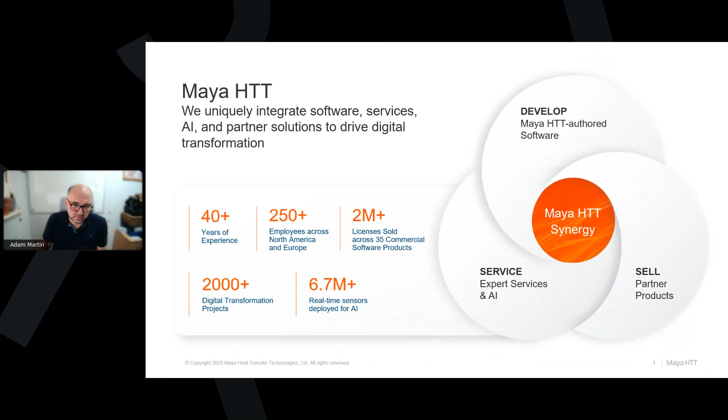Just a few words to start on who we are. We both work for Maya HTT, a global digitalization company where we focus on integration of software services, AI, and partner solutions, notably Siemens digital industry software, to drive digital transformation. We are one of Siemens' largest global partners, and in fact we've been in the digital business for over 40 years.

We have over 250 employees across North America and Europe, and now have over 2 million licenses sold to our clients. Maybe just to take you to the diagram on the right, our three core business activities are around software development. We also offer services around some of these software components, and we resell the software tools in both North America and Europe. Go to the next slide, Adam, please.

As mentioned, Siemens is our long-standing global partner. We've been really fortunate to have this collaboration with them, both from a technological partnership where we develop over 30 software modules in the Siemens digital industry software portfolio, but in addition we service and resell these software tools throughout the globe. So we've delivered over 2,000 services projects in PLM deployments, bespoke software development, AI, and using the data alongside the digital assets that our customers create to get the most out of it.

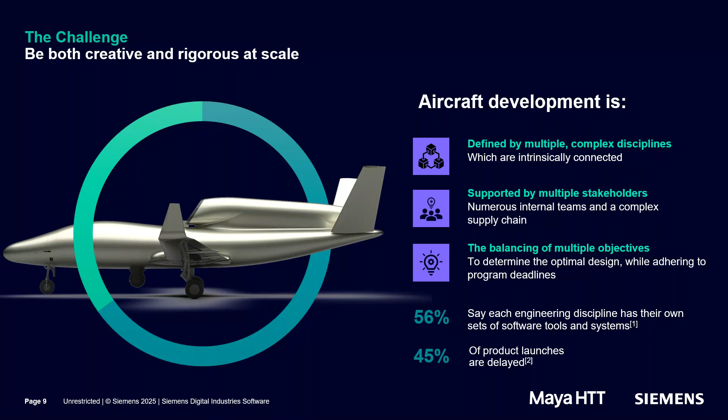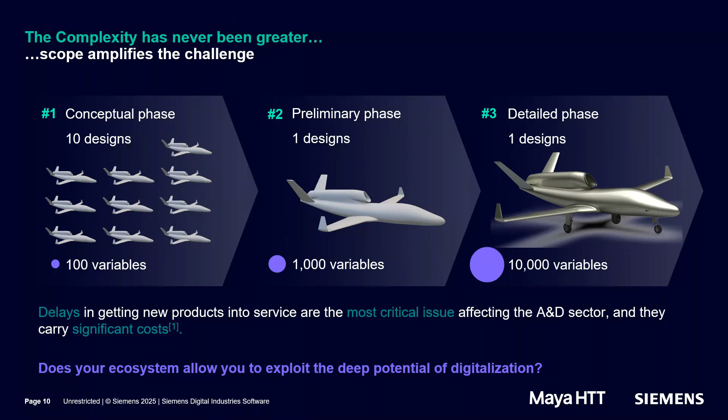As stated previously, delays in getting new products into service are the most critical issue affecting the A&D sector, and they carry significant penalties, a lot of that having to do with dealing with the complexity we're describing. So maybe the question to take us forward—the whole purpose of this webinar—is: does your ecosystem allow you to exploit the deep potential of digitalization? That's what we're going to explore in the next couple of slides.

Go to the next slide, Adam. So how do we bring innovative designs with improved manufacturing, manufacturability, and high performance faster to market? That's where we really bring together our partner Siemens's long experience in manufacturing with our experience and their strong experience in digital as well. Go to the next slide, Adam.

And really introduce the concept of digital twins. We'll dwell on that for a second. So instead of speaking about tools, whether CAD, CAM, CAE, or AI, we're talking about connected solutions, connected digital threads, each acting in key parts of the design, simulate, and manufacturing process that our aerospace and defense clients have to deal with.

Whether we're looking at mission-driven systems engineering, we build a digital mock-up, but we also look at the mission profile to ensure we meet all mission requirements. Another key digital thread, our focus today, is around taking design simulation tasks and having them work in tightly integrated, multidisciplinary and optimized fashion. We'll definitely focus on that.

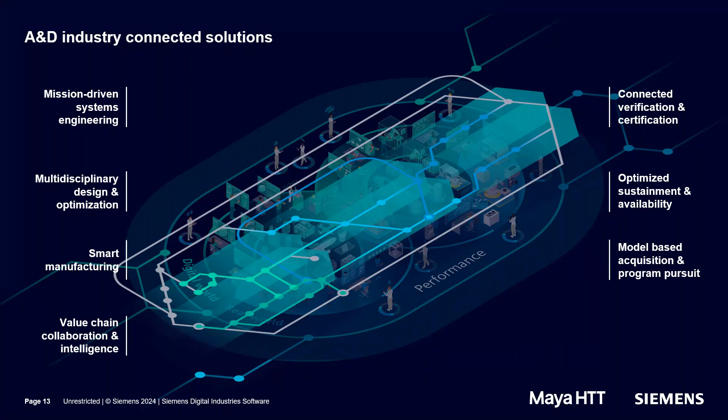Just go to the next slide, Adam. As stated previously, for today's webinar, we're really going to take a deeper dive and give examples around multidisciplinary design and optimization. Next slide, please.

So a few more words on some of the key ingredients to making this multidisciplinary design and optimization digital thread successful, and what we're effectively trying to do in practice. First of all, and that's one of our three focus areas, it's important to leverage a single source of truth to break down silos.

Really ensuring that at a program level, all stakeholders have access to the data and the latest versions of designs, change notices. So that's definitely one of the key ingredients and solutions to making some of our A&D clients more successful.

The second one, which is a classical challenge but also important, is around integration of mechanical, electrical, electronics, and software disciplines together, working in collaboration across teams. So making sure the over-the-wall classical approach is removed, that we really have a thriving collaborative environment, achieved by an integrated digital ecosystem that our clients operate with.

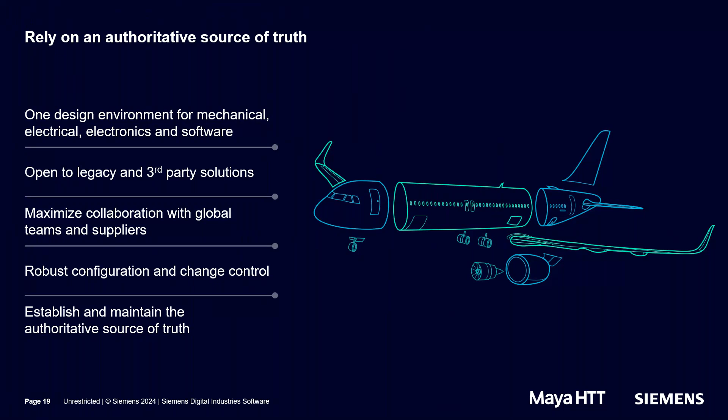So obviously for us, that would be a solution like Teamcenter. It's kind of the backbone of the digital thread. We're going to be storing all the data and different elements required for the workflows in the digital thread in Teamcenter. It's a unified platform for managing the change. So as I mentioned already, that's an important piece.

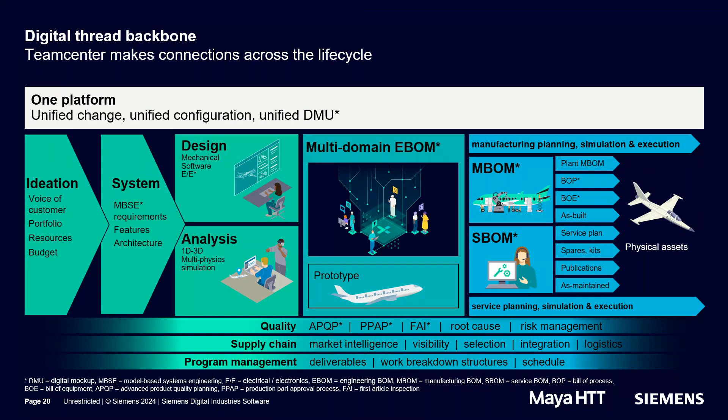And we've got the digital mock-up, effectively the designs that are available to us. As you can see from this slide, it's pretty comprehensive what Teamcenter can support, full life cycle right through to the service and service life of your products. But I'm just going to take a little bit of a deeper dive and look at some of the key enablers for the multidisciplinary optimization digital thread on the next slide.

So here we have a few of the kind of highlight areas, and I will be covering these in the examples. That's kind of why I'm introducing them at this stage. So at the beginning of most designs is where there is requirements.

And we're capturing those requirements, and we might be starting with systems models, so functional models of our system, and assigning requirements to that, which will be parameters. In Teamcenter, it's pretty open. You can work with something called System Modeling Workbench or Rhapsody or Cameo products, and link those in, and bring your requirements in.

And then clearly, for our design, we're going to work with CAD and the configurations of the different products. And we've got workflow capabilities to manage this, around assigning tasks and going through review steps and gates and so on.

And a big element of this is also what we call simulation process data management, SPDM. I guess many of you will be familiar with this technology, but this allows you to, within the Teamcenter environment, integrate your CAE tools and workflows, build, manage processes, reuse those processes, and capture the meshes and all the load case information, everything around simulation that you would do on designs, and link that back to the original geometry and the requirements that drive that in the first place.

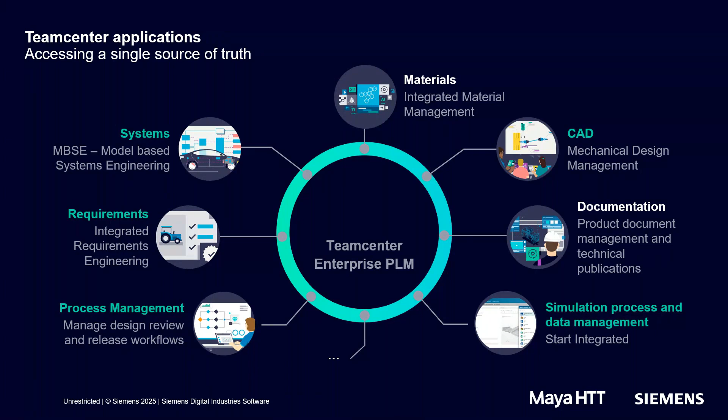So on the theme of integration, let's move to the second key element. Now we've got the foundations in, that's basically bringing all aspects of design together. This is where we look at the different physical areas we're working on for a product, and bring those together, ensuring all team members are working on the same and latest data, have visibility of the changes, regardless of which function they are.

You can see on the slide a lot of those examples, and that would include things like electrical design, we can bring together with the geometry, and then all the simulation capabilities in these different areas as well.

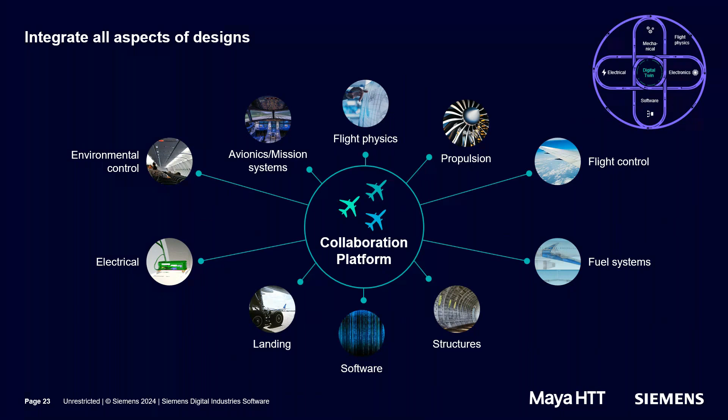So to illustrate this and how that might work, I've got an example to show you here. There's a lot of stuff here, and I'll talk through each of these steps one by one. Here we're looking at a design process around landing gear design.

It typically would involve multiple stakeholders, i.e. multiple engineers working on this. I'll take you through the product definition, cross-functional product engineering, verification and validation steps, and how that might look in the Teamcenter environment, working as a backbone, and linking that to the various tools to do each of the tasks. The example is a reconnaissance drone.

So we'll follow a process, and it starts with requirements. We'll look at that as the first step. Then from the requirements, we can build a multi-level functional systems model of the drone. In our case, our landing gear topology architecture, so how it fits together, has not been defined yet.

So we'll take the requirements and use a generative tool to build that topology. I'll show you a little bit of that. Once the landing gear topology has been defined, we can update our functional model and simulate the system level to make sure all the requirements are met.

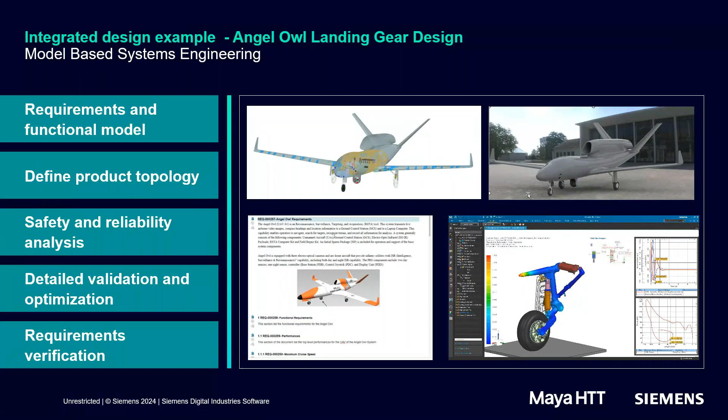And we can update and link that to our requirements. So we can then relate the requirements right down to the detailed model and vice versa. So it's a bit of an example of this integrated design process.

So looking at the first step, and I won't spend ages on each of these steps, just want to give you a flavor. Obviously if you've got questions, then we can have follow-ups and deep dives into these in follow-up sessions if there's anything that interests you here. But the first step here is we're looking at a functional model of the drone.

And it's bidirectional, and you get complete traceability. So we can look at a requirement, we can look at the parameter values associated with it, we can navigate to the functional model representation of that, and then later on you'll see how we can link that through to the geometry and the verification and validation simulation or test steps we've carried out with that.

So moving to developing topology. I've included this because I think it's kind of interesting.

So in this case, we're using a tool called Simcenter Studio to help us come up with a topology architecture for our landing gear. So we have a set of requirements, we have a set of parameters, and how do we build the best kind of landing gear to meet those requirements and have a performance that meets that. So this is one way of doing it with Simcenter Studio.

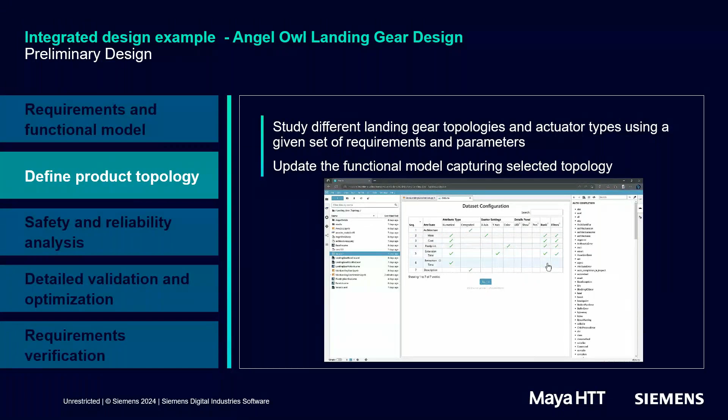And then we can use what that creates, the architecture of the design that's created here, to inform and build out a detailed 3D model and do further improvement on that. So as you can see, there's some tools to compare different designs as the video runs there. And again, if you want to find out a bit more about this technology and how it works, it's something we can definitely help with.

So let's assume we've gone through those steps. We've captured some requirements. We've defined an architecture for our landing gear with all of the pieces. So now another group might be running some risk simulation scenarios based on the design. This is known as RAMS. So we're looking at things like reliability, availability, maintainability, and safety of what we're designing.

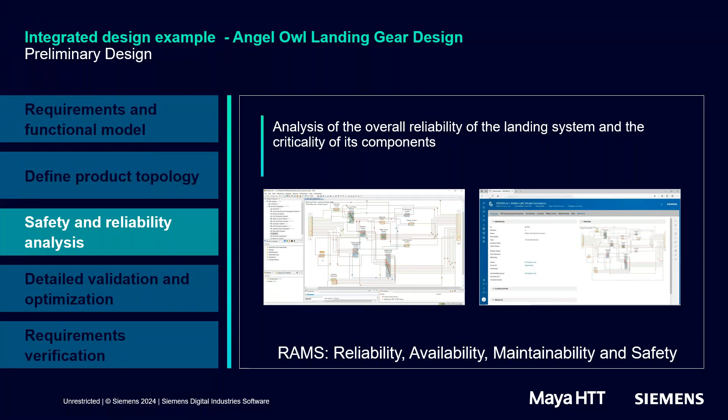And we create a functional and logical system design. And then using these tools, we can identify where there's risks in the system, potential failures, and where we might need to build in redundancy, for example. The models are again stored in our Teamcenter environment, which means if there's a change to our system, the use cases, etc., everything is connected, and we can update those models accordingly when we make any changes to requirements, for example. So integrating the safety and reliability.

In this particular example, we're looking at the stress loads that are created, and also the response of the control system. Is the gear deploying as we need it to against the speed requirements? So these requirements and parameters can be transferred from Teamcenter to a multi-optimization design tool.

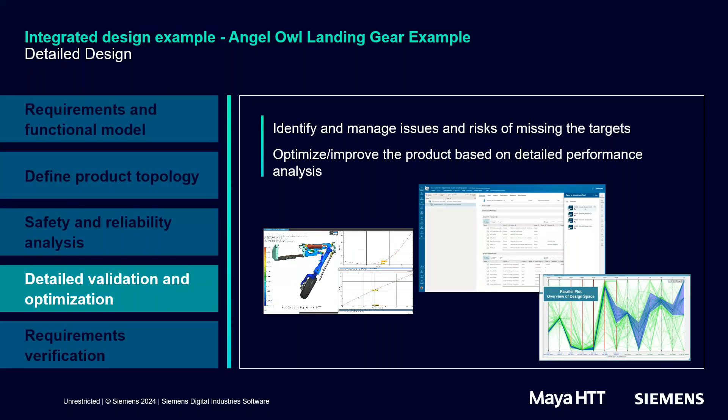So everything's integrated together. And once we generate a design, that can be saved back into Teamcenter and managed. And other people involved in the design can see those updates straight away. So the final step here that I'm illustrating is how that would happen in Teamcenter. So here we're looking at our requirements, and the optimized simulation model is then automatically linked back to the initial requirements.

And the output and reporting can be generated on it. So everyone now can see the status. They can see that the design's being optimized, and the design requirements have been met.

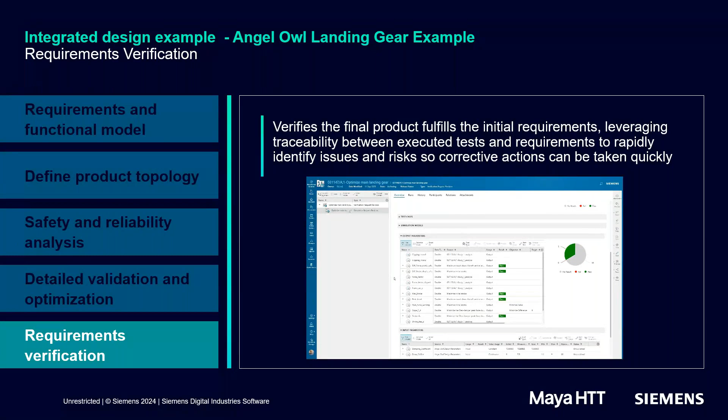So in this example, what I was hoping to illustrate is how this integrated system will allow different users working on different aspects of the design to collaborate, always working on the latest data. And in this screenshot, you can see how everything's linked together, and you can navigate back from the design to the requirements and vice versa. So wherever you're working within the group, you've got the latest version and you've got visibility of all the key changes.

So the final building block, and it really often depends on having the first two blocks in place, is that we can look at leveraging the power of iterative processes and automation. So we saw a little bit of this in the previous example where we looked at the HEEDS workflow, but I'm going to dig into this a bit more deeply with some more detail and also show how we can bring in AI and machine learning technologies to enhance this even further.

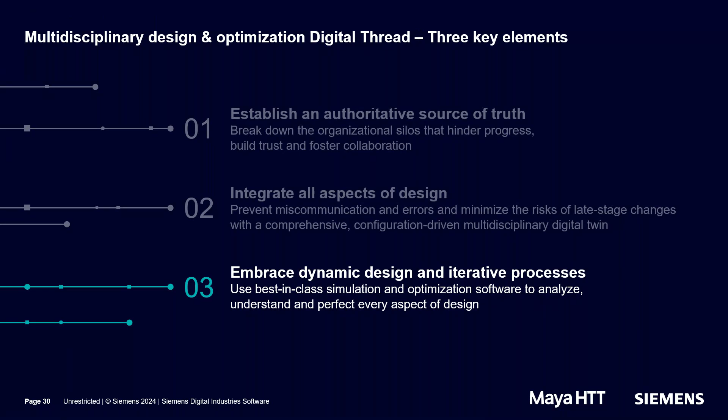So we'll look at a structural example related to our drones. So we're looking at the same drone here, but this time we're going to look at the structural design and how we could capture a workflow to do that, and some of the benefits of that and how that works.

Typically, developing a design-based environment for structural engineering of an aircraft involves comprehensive simulation. You do need to integrate test with this, and we see on the slide here how we would extend into the CAE world for this work.

So typically we'd be using something called simulation process data management, which I've touched on before. This is an open set of tools, so we can bring in our different simulation tools. We don't have to necessarily use all of the Simcenter Siemens tools here, this is fairly open, we can use third-party tools to integrate. Depending on what you're already using for your CAE analysis, we can build up the methods and the tools and capture those within the system.

And then we can use SPDM tools to drive those processes and get the level of collaboration that we saw in the previous example. So what might this look like?

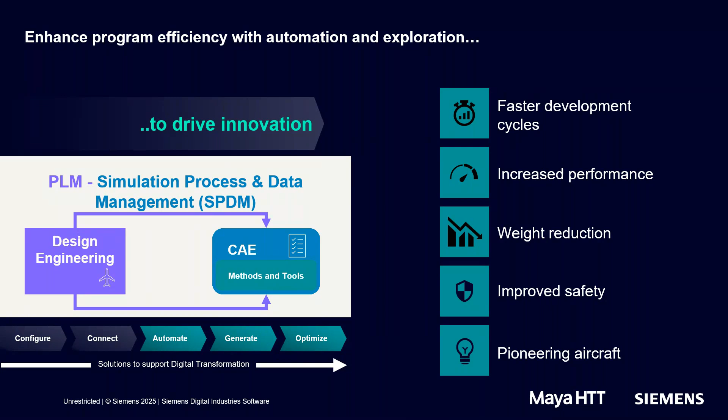So I expand this out. Within the system, we can connect the relevant disciplines. We can launch aerodynamics to get loads, for example. We can do our aeroelastic analysis, structural and stress verification analysis. And we can even bring in, if we were doing some kind of advanced manufacturing type simulation, we could bring that in. So we can build out our structural workflow and capture that within the Teamcenter and SPDM environment.

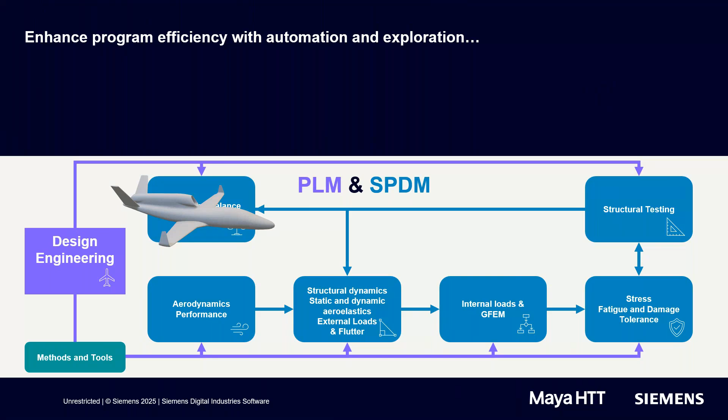And then we can start automating steps of that and very efficiently working around the process. Very much like we did with our landing gear piece, we can capture each iteration and the results that are generated at each stage, share that, and revision the designs.

And then this lends itself really nicely to automating processes, now we've got the foundation in place. So I have an example here of a wing design looking at margin of safety based on loads. We can take our workflow methods, we can place them in a tool like HEEDS, and we can automate the workflow.

In this case, we're seeing the CAD model being updated, which updates our mesh, and ultimately we calculate loads and the relevant margins of safety. And this has got huge advantages.

Obviously, we can cover a lot of design points very quickly. For example, if you had 20 variables you were designing, and varied in this wing design, and each of those variables had 2 values, that's 1 million design points potentially. You're never obviously going to do that manually. So bringing in these type of tools allows you to explore that design space very efficiently, and you can drive that with what we would call intelligent search tools, which is also part of the HEEDS technology.

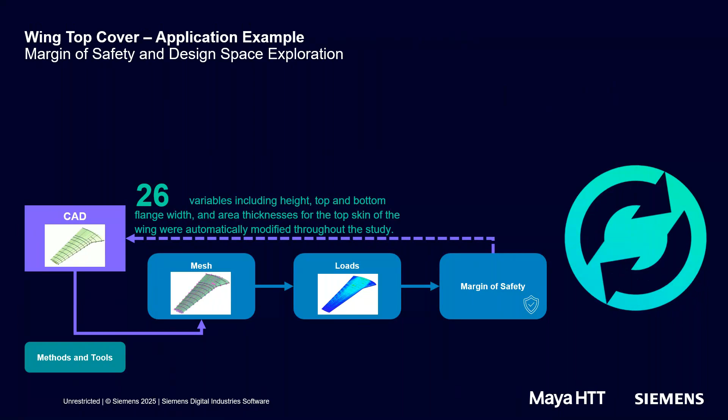All connected and embeddable within the Teamcenter environment. So there's a little bit more detail on what we're doing in that wing analysis tool. Hopefully the visuals help you understand what's going on.

So we've built our workflow. We've captured the different simulation tools required to run the analysis, and then we can bring it into a HEEDS process. What you see on the screen here now is each design point, or each point represents a design.

The red dots are where the design has exceeded the constraints that we've set, in this particular case around margin of safety constraints. Each blue dot shows a design which is okay against the constraints. And the blue line here shows the best design so far. In this case, we're looking for the lowest mass, which meets the design constraints that we've put in place.

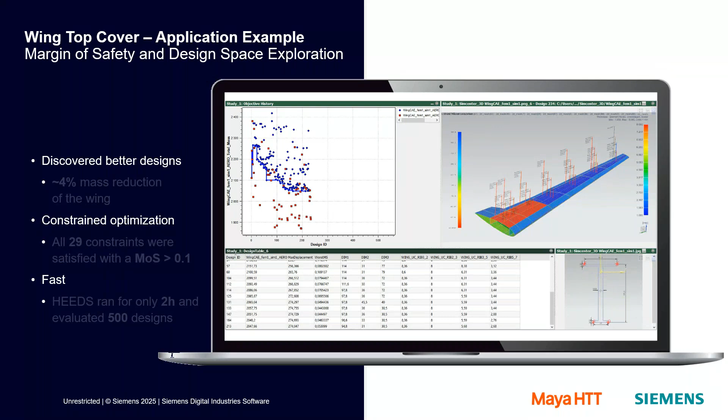So if you ran this as an automated process, all of the kind of views that you see would be automatically captured. Then it's very easy to compare and analyze the result sets you've got.

In this case, we were able to reduce the mass of the wing structure against our constraints by 4%, which is potentially a huge gain in terms of performance.

And we can run these iterations very quickly. We can make use of hardware that's available to do that. We can run these things overnight, over the weekend, those kind of things. In this particular case, we did sort of 500 design evaluations and did that in 2 hours.

And the tool set has a whole set of post-processing tools to help you sort and rank the different designs you found and pick out what is the optimum against your requirements. This goes back to the stuff that Nick was talking about, the complexity in design and balancing all the different design attributes. These tools allow you to do that and do that very efficiently.

So once we have a new design, we could potentially capture that and create a new design revision and bring that back for further work and analysis.

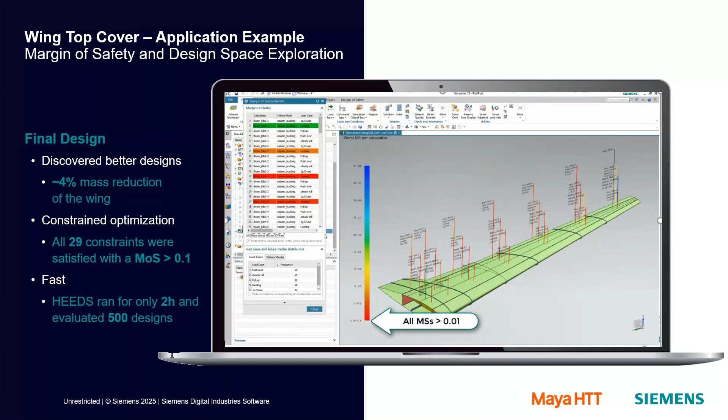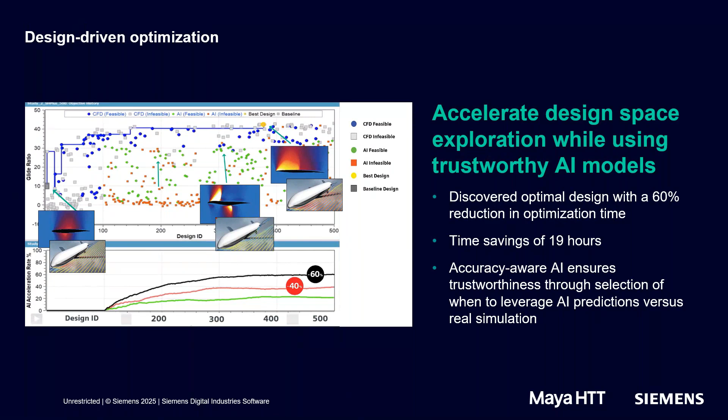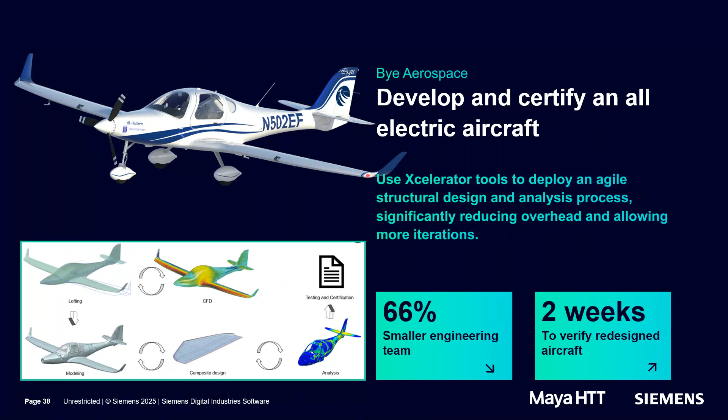So with that, I'm going to hand back to Nicholas to take us into a kind of wrap up of the session. So Nick, handing the ball back to you.